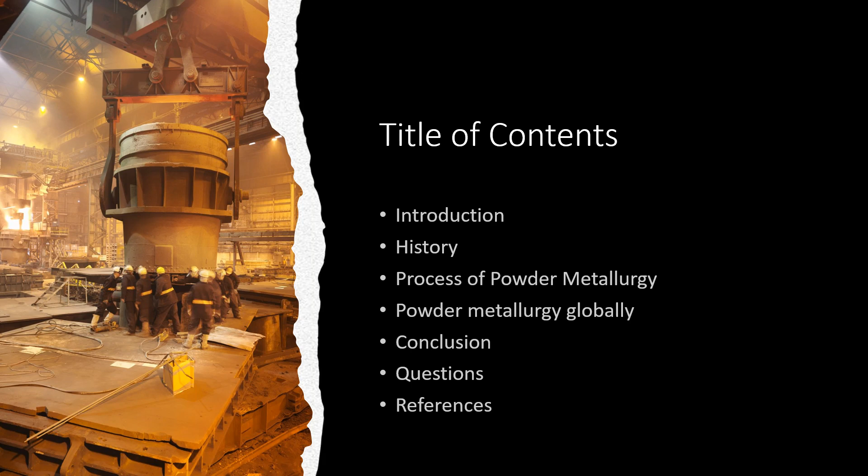So first, we're just going to start with the introduction. So what is powder metallurgy? There are a wide range of ways that parts can be made with metal powders. These methods are used in a variety of industries and fields, and it is growing in popularity. The metal powders are especially useful because they can help with increasing or decreasing properties in order to have the desired effect for said product. The most popular powders that are normally used are red and black cupric oxide, nickel, aluminum, tin, and copper.

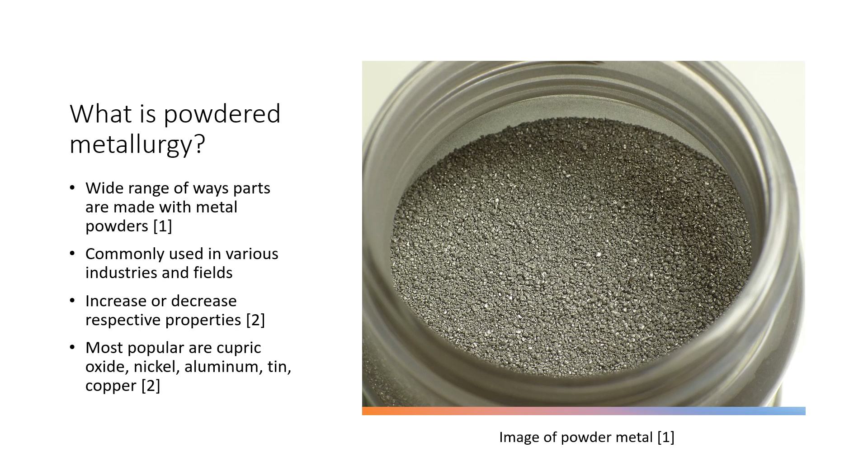So because of how widely used powders are, you might not actually realize what some metal powders are actually used in, and it's kind of interesting. So I'll just be going over several different examples. First is aluminum. It's a very versatile material and it is commonly used for fireworks and pyrotechnics due to flammability. It can also be used for metallic paints and manufacturing of solar cells.

Bismuth is commonly used for alloys such as steel or aluminum, as well as production of batteries and welding rods. Cadmium oxide is used to create silver alloys, glazes that are used for both ceramics and plating steel, and the production of transparent conductors, semiconductors, and nickel-cadmium batteries. Granular copper is commonly used for self-lubricating bearings, injection molding, lubricants, and coatings.

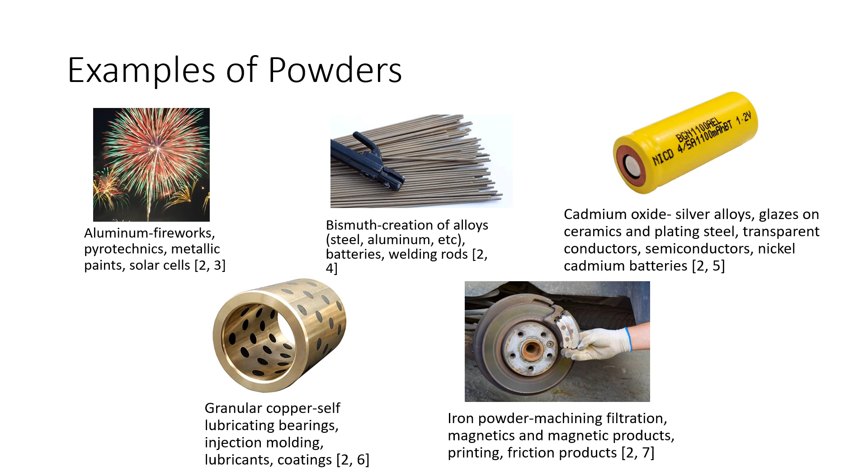Iron powder can be used for machining, filtration, and the making of magnetics and magnetic products, as well as printing and friction products, such as brake pads. Manganese powders are used for steel and iron industries in order to create alloys for the manufacturing of tools, machinery, car parts, and construction. Nickel is normally combined with steel and iron in order to help with corrosion resistance.

Red and black cupric oxide is normally combined with copper for wood treatments and any pigments that are used in glazes and ceramics. M and SW grade tin powders are normally used in spray-on applications, normally for corrosion resistance. They're also used to make high-powered magnets and self-lubricating bearings. Similarly to aluminum, zinc is also very versatile, and it's commonly used for galvanized steel or brass, as well as different types of paints and precision die casting, plating, and plating of other metals.

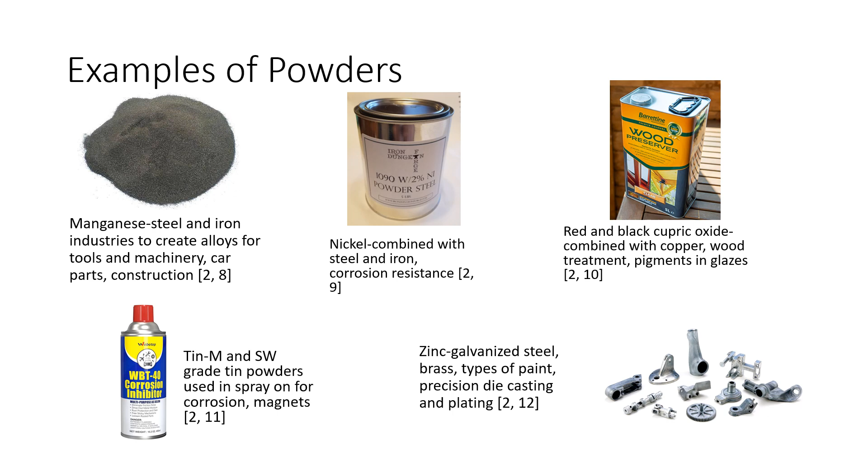So now we're just going to talk a little bit about the history. In the very beginning, people would simply hammer the powders. This is much earlier on, but mainly using enough pressure in order to ensure that a solid shape would actually begin to form. The first tracked use of powder metallurgy, though, was around 3000 BC. It was seen that Egyptians would use iron powder in order to make objects. Similarly, in Central and South America, people would use platinum or gold powders in order to turn the powder into jewelry.

Powder metallurgy was a similar method for Indian craftsmen with the Delhi pillar. This was estimated to be built between 375 and 414 AD, with it being roughly 6.5 tons. In Europe, records began to show that this process was actually used in Spain in the 18th century and England and Russia in the 19th century.

Modern powder sintering actually began in the late 19th century, which was roughly around the time that electricity was first invented. In the 1920s, people began to use it to make tools and self-lubricating bearings, and the 1930s allowed for magnetic materials. Germans began to make firearms with it in the 1940s, and car parts were made after World War II. Powder metal processes were used for metal injection in the 1980s and additive manufacturing in the 2000s. And then just a couple of pictures on the right, showing what was actually made with it.

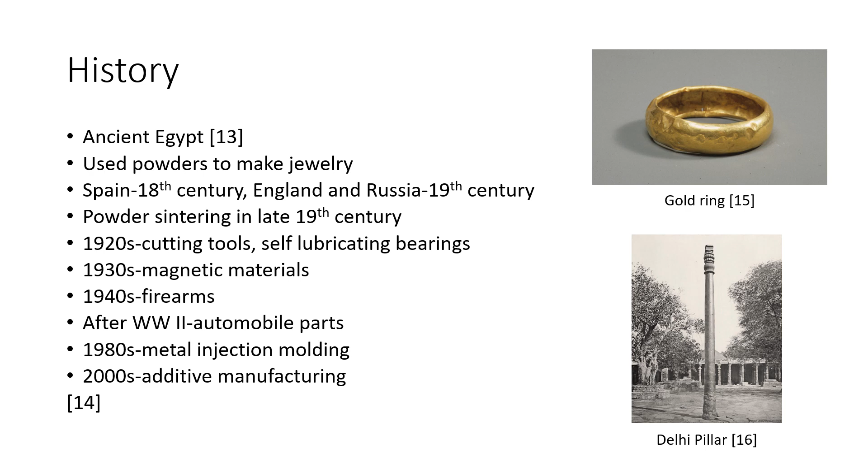So now we'll be discussing the process of powder metallurgy. Alloys are first processed so that they become a fine grain-like powder, where it is then blended with other alloys. It is through this process that we begin to gain the desired material properties or characteristics that we would need for the product. This allows for great flexibility as well as customizability. The metals can be powdered through solid state reduction, atomization, electrolysis, or chemical treatment, such as oxide reduction and thermal decomposition. It can be blended with metals or alloying agents, such as lubricants, to reduce friction or increase fluidity.

The powder is packed into the desired geometry, which can be shaped through dies, punches, or even hydraulic presses. The parts are normally formed through a combination of heat and compression, which helps improve their strength. Secondary treatments can be used afterwards, depending on the product itself. Some of these include heat treating, machining, impregnation, or finishing.

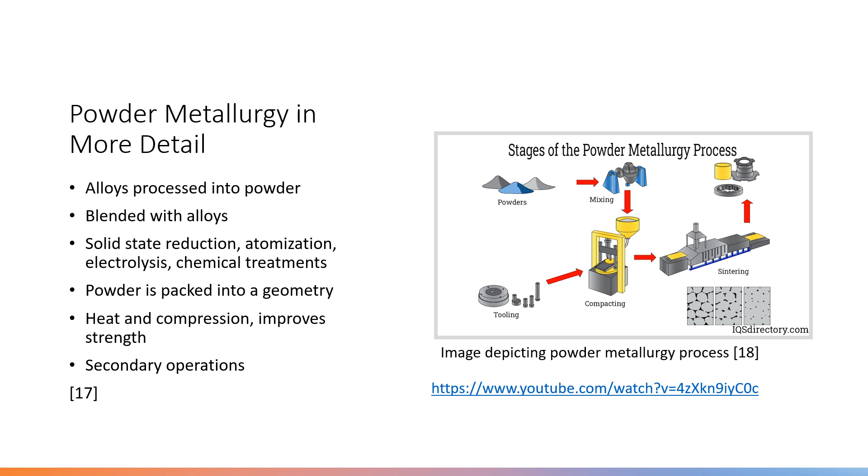The image to the right shows the process of powder metallurgy. First, the powder is gathered and then mixed and placed into the compacting machine. Meanwhile, any additional tooling could be used to reach the desired shape. Next, the product is sintered, which would then result in the final product. So I'm going to show a quick video showing the compaction process, just so you have a better idea of what it's like.

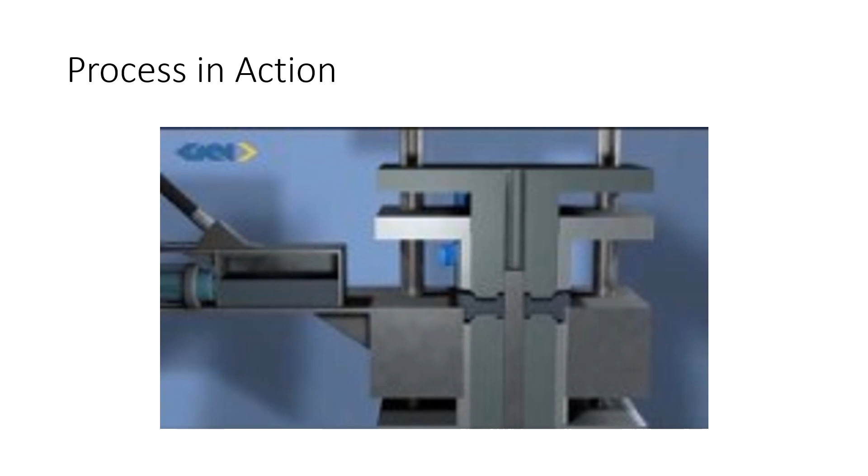Okay, one of the most common process methods used for metal powders is atomization, and normally this refers to a liquid form. The metal is commonly broken up into droplets through exposure to water, air, or inert gas. If water is used, this can lead to irregularly shaped particles that are normally pressed. Centrifugal force is another atomization process, where a spinning disk breaks up the metal powder.

Heat treatments can be used to change the properties of the metals, normally through softening or hardening the metal. Sometimes only the surface needs to be heat treated, while other times, in order for the heat to impact the entire piece, you would need to wait for the metal to reach temperature before the heat treatment actually starts.

For example, I had previously done work at the foundry where I took a sample of an alloy where I basically had to wait 20 minutes for the sample to reach temperature before actually starting the timer for heat treatment of 2 hours. So overall the heat treatment process took 2 hours and 20 minutes, including the time that it took for the metal to reach temperature.

Surface treating depends on the purpose of the product, specifically corrosion resistance, which would act as a barrier for the environment, or barrier protection, or galvanic protection, which are films to protect steel against sharp objects. There can also be thermal spray coating or vacuum coating. In order to determine metallography, optical microscopy or electron microscopy is used. Metal testing can then be performed for the desired features, such as yield stress, elongation, hardness, and toughness.

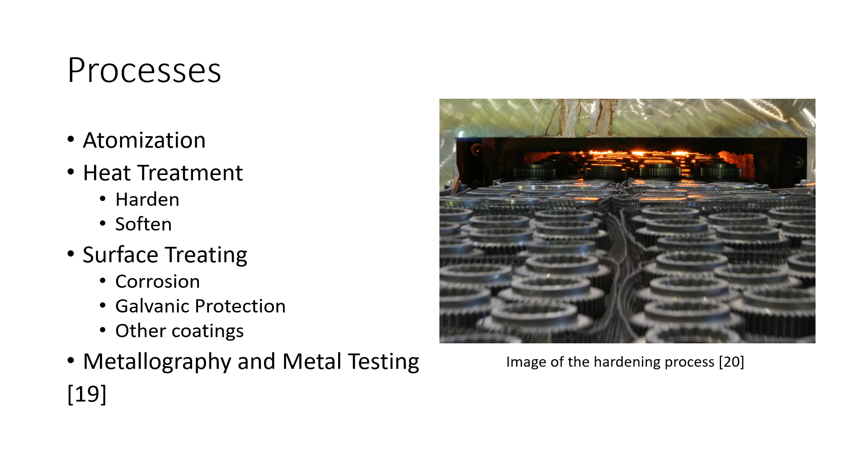So there are several different advantages to this process. This includes allowing for waste materials and costs to be effectively reduced, even using up to 97% of the original material, being able to alter the properties through factors such as the powder type, particle size, and sintering conditions, producing complex parts, skipping the finishing process, and being reproducible as well.

However, with many advantages, there are also several disadvantages, such as not being able to produce large complex shapes and it not being very cost effective to create small amounts of the product, as well as density changing depending on how the part was condensed as a whole. So these are all types of things that you actually need to consider when deciding what manufacturing process you would want to do for your product.

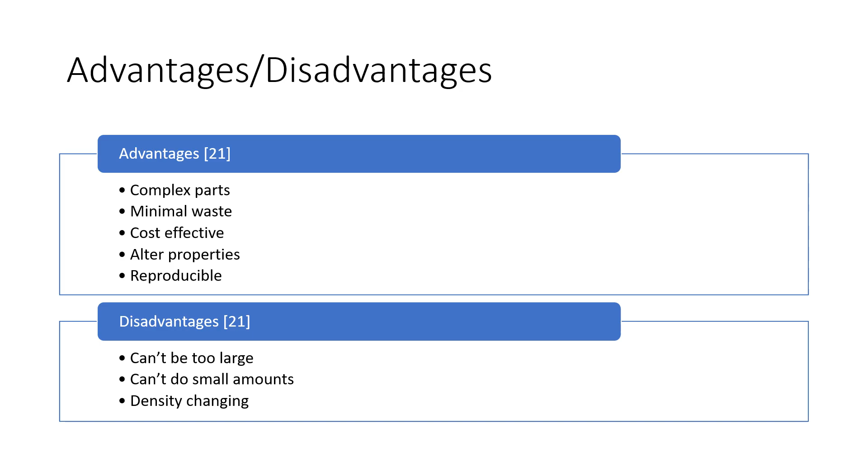So next we're going to talk about powder metallurgy globally. So currently, the global metallurgy market is growing through several different industries. This is one of the reasons: it's simply due to natural gas and crude oil exploration. It's helping to increase the growth, as well as competitive pressure, new metal fabrication and repair technologies, and new equipment and supplies. Powder metallurgy is also gaining a lot of interest for medical, biotechnology, and healthcare fields.

However, it did slow down a little bit due to the coronavirus. Throughout all of the fields, it experienced lower than expected demands, declining roughly 2.2% in 2020. During this time period, there was also an irregular demand with a focus on industrial services, operations, and repairs, leading to problems with business goals. During the pandemic, automotive companies, an industry that commonly uses this manufacturing process, had to close their facilities or lower the production capacity due to the decreasing amount of materials or the reduced manpower.

Now that the pandemic is over and society is relatively back to normal, there's an increased amount of spending, allowing for the automobile industry to grow once again. This industry also uses powder metallurgy for additional processes like laminate molding, metal injection, cutting, and welding. The US is actually roughly 35% of the global market, and it was estimated that it would reach 1.1 billion at the end of 2022. It is here that there is a solid demand for metal powders, both for steel and additive manufacturing.

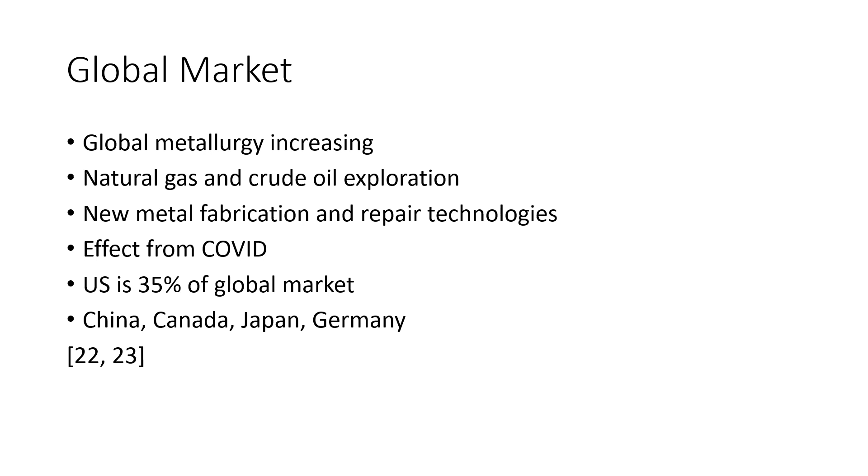Meanwhile, this graph mainly focuses on the US part of this through the same industries. Although this might, once again, not have the full percentages, it can be seen that the largest industry, once again, is the automotive industry, with the smallest actually being miscellaneous fields. It is very interesting to see how it differs compared to the global market share. The medical field is a little bit smaller in the United States, roughly the same size as the electrical and electronic field. The miscellaneous field, although the smallest field, is roughly the same size as the global market share for miscellaneous as well.

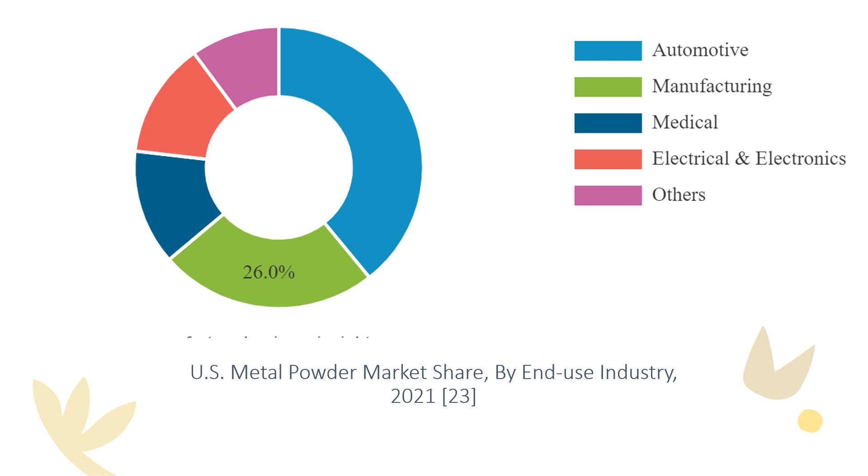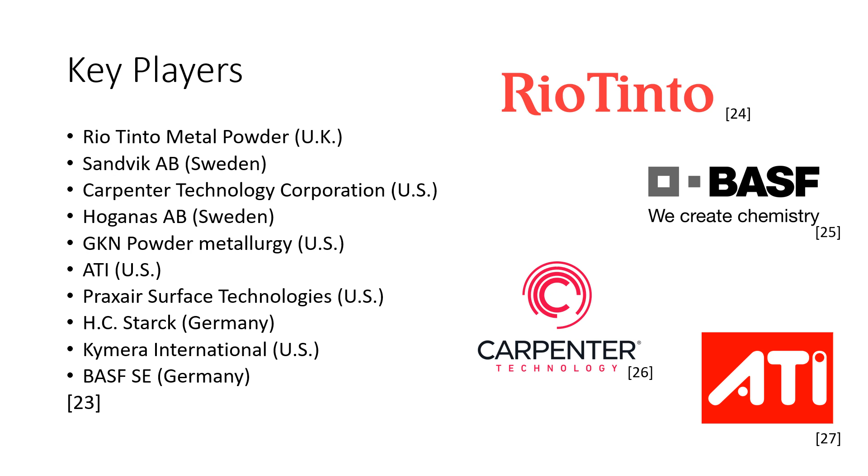Then these are a list of some of the companies that Fortune Business Insights thought were some key players of the powder metallurgy market. It can be seen that the majority were from the United States, with a couple from various companies in Europe, especially in Germany.

In China, the modern usage of powder metallurgy actually first began in the 1950s, and over the past 50 years, it became one of the countries that were using the process, learning how new materials and techniques could be used. China first started this manufacturing process with copper-based bearings, which were made by the Shanghai factory of textile machines. Iron soon followed in the 1960s. New technology was introduced in the 1980s, such as high-precision presses and advanced sintering furnaces. In the early 2000s, the amount of copper parts actually increased very quickly.

China also has various industries which use it as well, such as cemented carbide, which began around 1958. That also increased in size, especially with manufacturers that use tungsten; these products range from metal cutting and mining tips and wire dies, as well as other special and large products. Some other material industries include refractory metals, magnets, and friction materials.

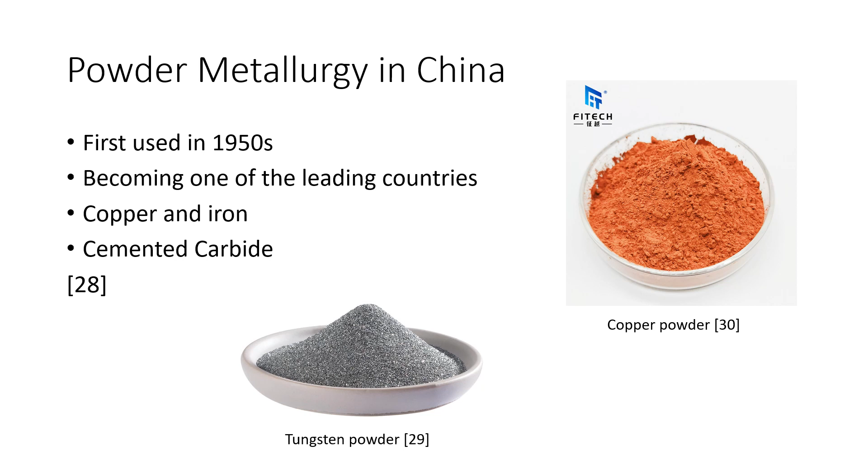How was it able to grow so quickly in China, though? They focused on education for professionals in order to ensure that research was performed to learn about new techniques and materials that could be used for powder metallurgy. The government also wanted to focus on the technology and materials being worked on by many research lab divisions, and even encouraged the creation of several specialized powder metallurgy institutes. Although China is still behind the US, it is still gradually increasing its products, learning more about the manufacturing process.

Similarly to China, people in Germany are focusing on growing their powder metallurgy field. This is mainly through a joint committee which involves the German Materials Society, the German Ceramics Society, the Steel Institute, the Association of German Engineers, and the Powder Metallurgy Association. Through this committee, they are able to schedule events and lectures, allowing everyone to learn about the process.

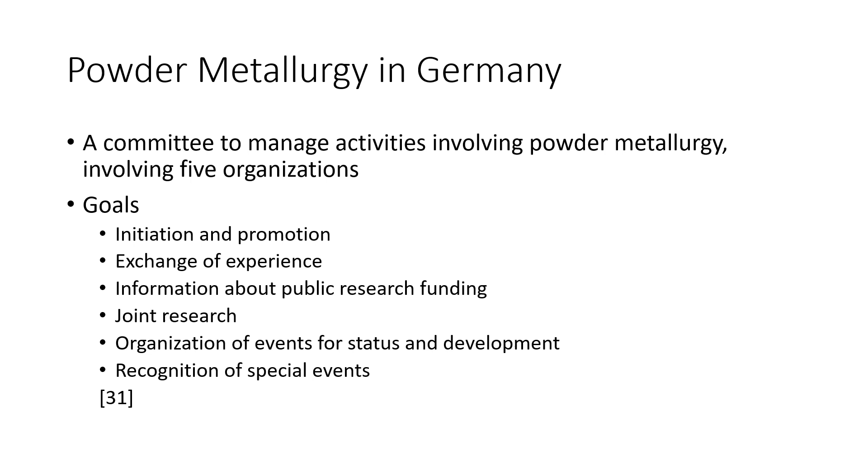The main goal of this committee is to be able to promote work that is done in the powder metallurgy field. This includes initiation and promotion of contacts, regular exchange of experiences, information about public research funding, conception, organization, and monitoring of joint research, organization of events such as lectures to report on the status and development, as well as recognition of special events.

So just as a conclusion, powder metallurgy is a type of manufacturing process that, although it might not be widely known, is used for a variety of different purposes and products. However, interest is growing, and there seems to be an even larger emphasis on using this process in order to find new materials and come up with new techniques to make it an even more ideal manufacturing process. Traces of powder metallurgy can be seen thousands of years ago. However, it is catching on in Europe and the Asia-Pacific area, although it might have slowed down due to the coronavirus.

Powder metallurgy is useful because of the complex parts that can be made from it, as well as allowing for minimal waste. There are calls to action for companies to reduce their waste and to have more environmentally friendly processes, with companies pledging to become cleaner by a certain amount of years, so this is an especially useful process to use. It is able to cut down their costs significantly as well, just simply using powder metallurgy.

Globally, it can be seen that each country uses this process differently, with more emphasis on some industry fields as opposed to others. However, the one thing that they seem to all have in common is that they are growing in this field, encouraging more research and learning to occur, whether it be through additional funding in China or forming a committee that allows for continued learning in this field. All in all, it can be seen that powder metallurgy is making its impact, and it will continue to grow in interest, and it will be interesting to see what other advances it will make in the future.